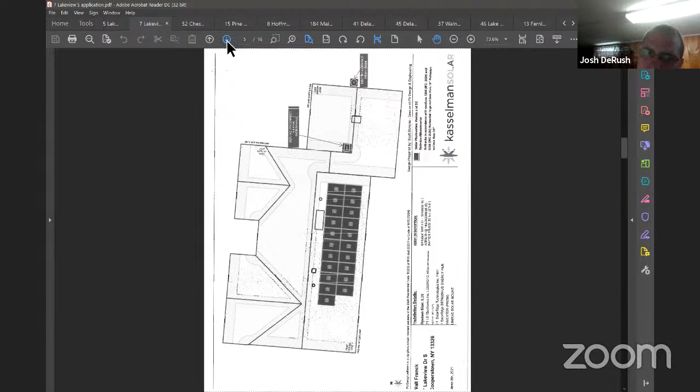We'll get to the picture. 21 solar panels on the rear roof, so nobody's going to be able to see it from the road. They are non-metallic, so no glares coming off them at all. We're doing the portrait, landscape, or basically a portrait style on the back, all flush mount. It's all metal racking underneath.

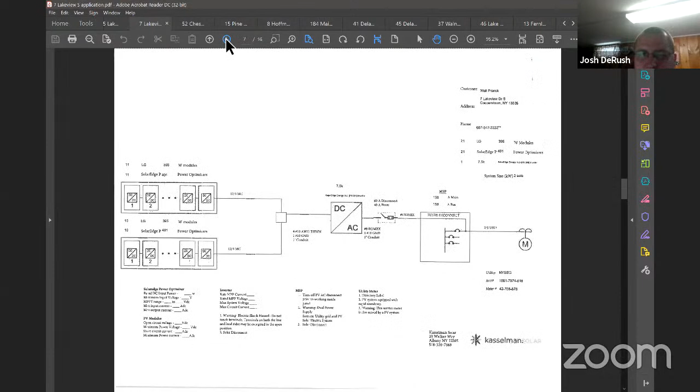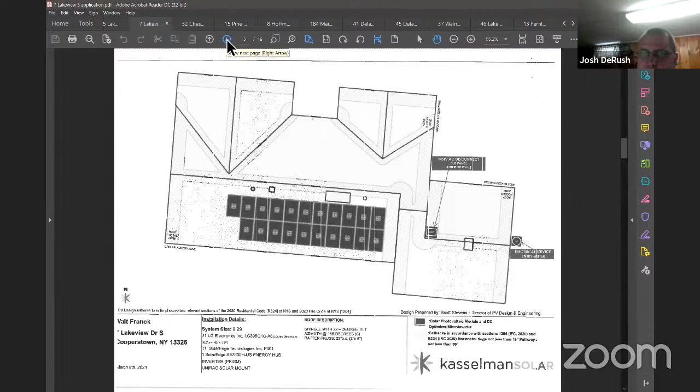They are LG panels, if I believe I'm correct. Yeah, so they're 365 LG panels, so they are definitely all black. There's nothing on metal siding that can reflect sun or anything like that. And that was basically the best side of the house with the way the sun hits their yard, so for them to get most production, that's kind of why we landed on that rear roof. And it's better from the road view, you can't see it the way it's sloped down in the back. So that's kind of what our design engineers and our salesmen came up with.

Great, does anybody have any questions for Josh? I don't, none here. And Jesse, I'm sorry, go ahead. Nope. Pat? No, no, I'm good.

Okay, and I'll just ask this for point of the grandmother test. If any other future homeowner or whatever wanted to remove these, they are reversible, not that you'd want to reverse them, but they can be removed, correct? Yep, they can be removed, and all the punctures from the roof can be sealed correctly, and there would be no leaks. So yes, fully removable system. And that's kind of something we weigh as a committee, if you're adding this material, you can take it away.

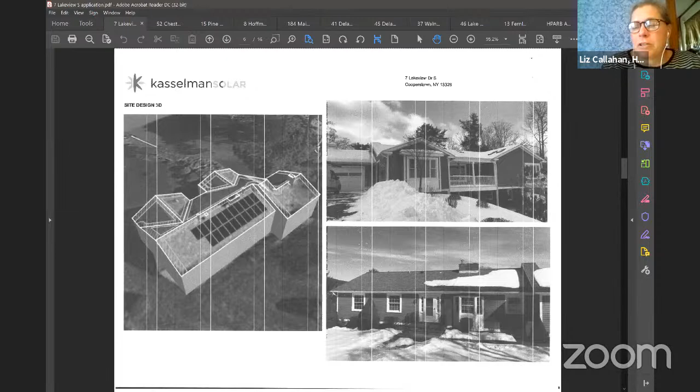So great, well, if there are no other questions, does anybody want to make a motion? Sure, I'll make a motion. Thanks, Mark. The Historic Preservation and Architectural Review Board has made the following findings regarding the installation of solar panels at 7 Lakeview Drive South: requirements of SEQR have been met, structure is not listed.

The proposed work meets the criteria under section 326E.

2B, 3C, and 5. Now therefore be it resolved.

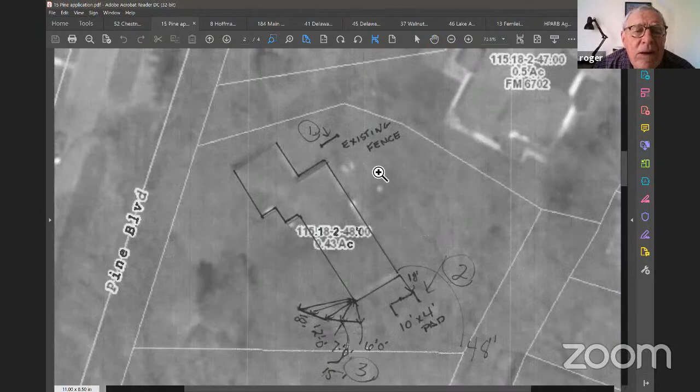So where my cursor is right now was one of the 6-foot tall panels that's only 8 feet wide. Then back here was where the propane tank was, so there's the 4-foot high panels that are wrapping on 3 sides. And then roughly in this area is the 48-foot long one that's basically designed to follow the grade, so it's angled somewhat.

Correct, Karen, as far as that goes, you said it perfectly. But it's outside of the setback requirements, so it did not need approval from the adjacent neighbor down here. None of this one is outside the setback. So neighbor approval was not required for this fence anywhere.

So the drawing is not to scale. That's the thing I stumbled over before. Yeah, it's a lot longer than what's shown in the picture. It's 48 feet long total. Yeah, okay, so I was trying to figure out how that worked.

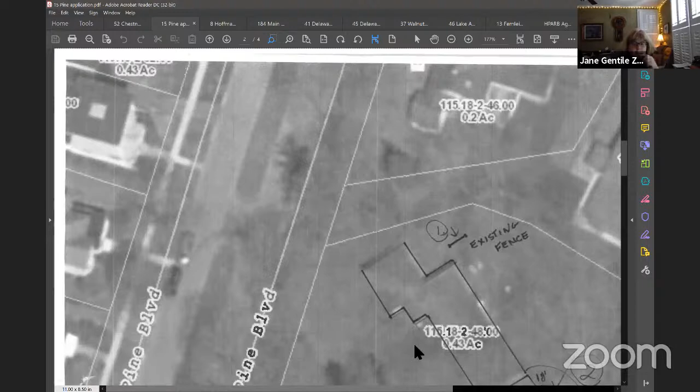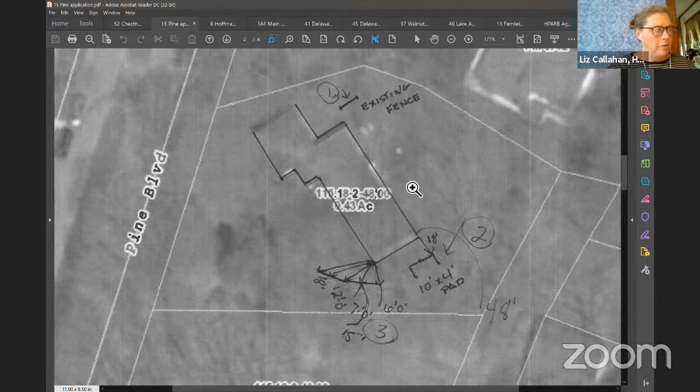And just to confirm, you've given us a photograph of a wood fence. I will confirm that the materials are wood. Correct. Okay.

Anybody have any questions? It should be 15 Pine and not 13 Pine. Right, I hadn't even noticed it on the order. That's your address though, so that's fine. But the application reads correctly, so that's fine. We can do that.

Thanks. And the image, now there are two different images. The image in the estimate is a little bit different than the image in the picture. Yes, when he presented it to me, he said, what about this one? And I don't, it's got too much going on, I don't want the lattice. Basically, it's gonna end up looking like the fence at the Bank of Cooperstown.

Will it have the copper finials too, or caps I should say? No, it won't. My goal is to have it mimic the board and batten house, and then paint it the same color as the house, which is dark green, so it all blends in. The house is looking really good. Thank you. All right, any other questions?

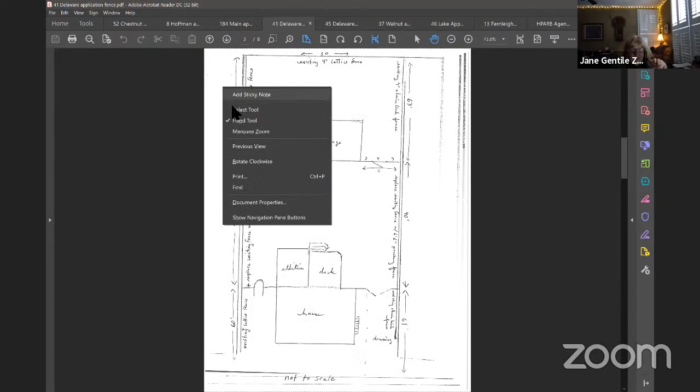This is not to scale because the property is 50 feet wide and 160 something deep. In order to get it to scale, I would have had to use 2 pieces of paper, which I did.

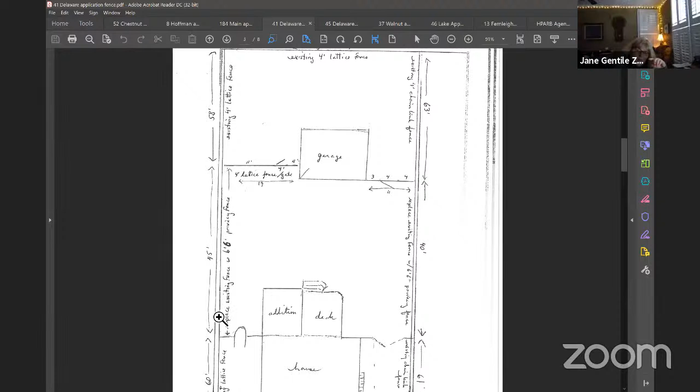This is the 6 foot privacy fence, here and here. Here's the existing fence where the trellis is. This is the back of the original house before the addition. So it'll go from the trellis this far back, which is 45 feet on that side, and that'll be 6 foot 6 inches. It's pressure treated panels, but the top part has 1.5 feet of lattice.

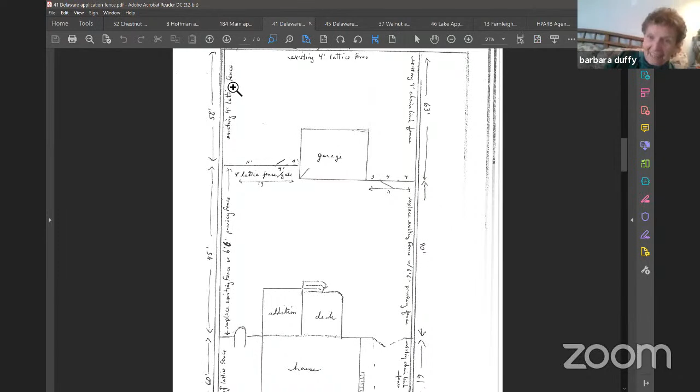Like the picture the other lady didn't like, I liked because I'm trying to make it sort of consistent with the existing fence, which is all lattice. That's the idea that I want to put up.

I think I gave you a picture of my existing fence. We do have that in the file. The problem with the existing one is the dogs can see through and they pay attention to everything that happens. So the outside border pieces will be 6'6" and then have some lattice on the top.

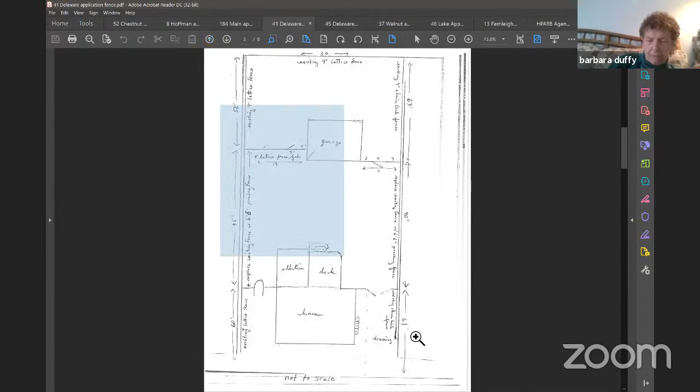Then the interior fences go from the border to the garage. This goes behind the door of the garage, so I can still get in. That will be the same as what's around the rest of the property, 4 foot 4 inches with all lattice. And on this side, it goes 11 feet to the side, same thing.

Both of them have gates. I may have to make this 4 foot gate a little wider because I'm not sure it'll be wide enough for any workman that needs to get to the back section, because there's still almost 60 feet of land in the back. It's a very, very deep piece of property.

So this part will look like this, and they can see through it, but there's not as much to see through as there is on the sides.

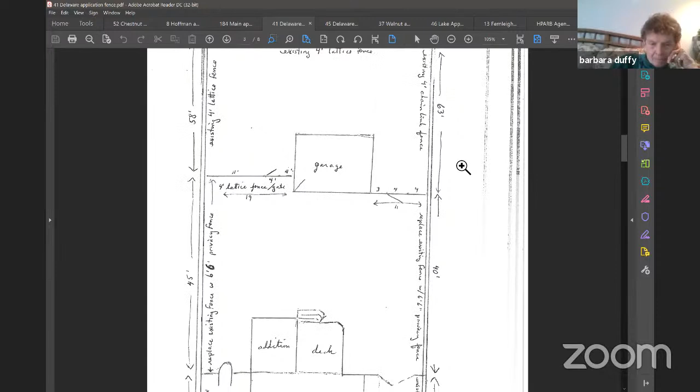Did she need permission from the neighbors? Yeah, she has a letter in the file. And they were both thrilled.

That's a lot of dog. Yeah, it is. They're beautiful, but they're a handful and they like to pay attention to what's going on, especially on the southern side where Orion rents. The driveway is right there, so everybody that comes in gets a bit of a welcoming. 2 German Shepherds.

Well, the one that's going to be 11 years old, I don't expect to live very long. She's got a problem with her spleen. Last year they told me she probably had weeks. Well, she's surviving quite well and enjoying the backyard, but she's not going to live much longer. So then I'll be down to 1.

The younger one is just 3. And my 2 cats inside. Very exciting at my house. Sounds like a handful, kind of a rodeo, I think, most of the time.

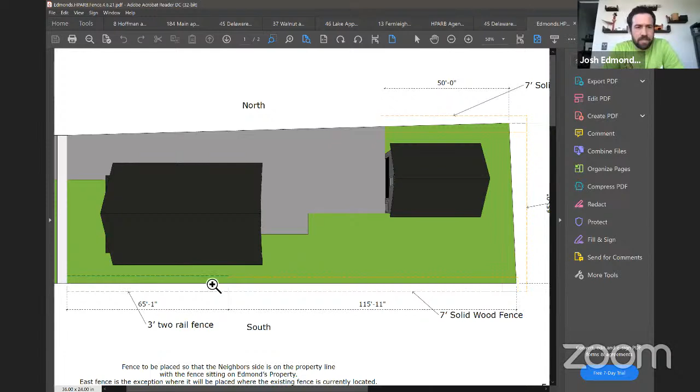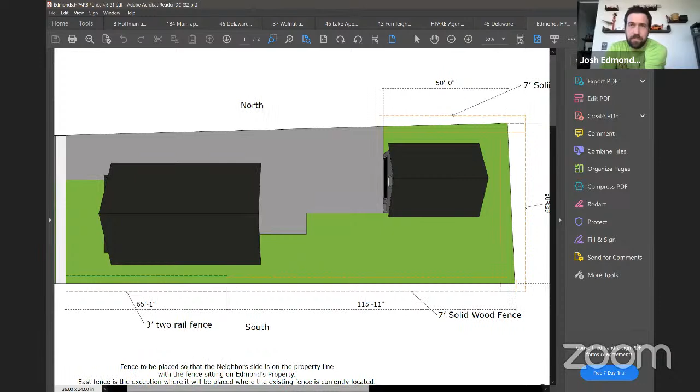So what you're looking at, on the bottom side of the drawing here, the front section, the front 65 feet, there is an existing 2-rail fence that runs along there. I simply want to replace that. And then the back section currently has a 6-foot tall privacy fence. I'd like to replace that with a 7-foot. And then on the back of the property, there's a privacy fence too, and I'd just like them all to match, so I'm just replacing that one right where it is. The only new fence is at the top there on the north side, where I'm doing a section wrapping along that side of the garage.

The proposed fence, the new fence, is going to be larch, which is like a cousin of hemlock. It's slightly rot resistant, but not pressure treated. I am using pressure treated 6x6 for my main posts, just because if they're going to be in the ground, they'll last a lot longer.

So that's the back fence I want to replace. Why do you want to add the extra foot? Because my property is higher than my neighbor's, so on my side I'll have a 6-foot fence and the neighbor's side is 7 foot. That's the reason for the additional foot.

Because right now I kind of see right over top, and the house on the corner, we share a very tight backyard. That way, when we're sitting on the porch, we're not staring at the neighbors eating their dinner at the same time.

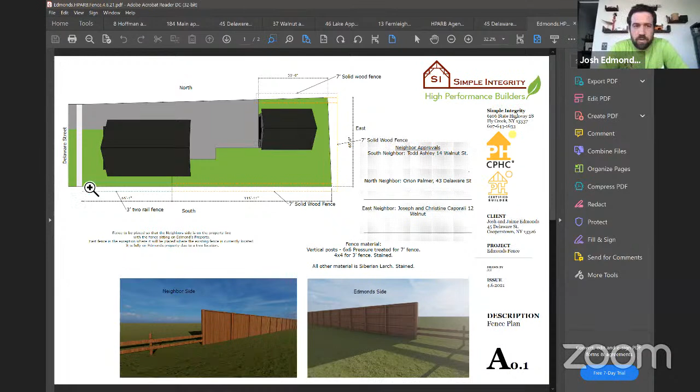Okay, any other questions for Josh? And it's as pictured in the images, in A0.1, correct Josh? Yes, that is the actual drawing of the fence I plan to construct.

Any questions? Somebody like to make a motion? Sure, I can make a motion. Thank you, Mark.

Whereas the Historic Preservation and Architectural Review Board has made the following findings regarding installation of fencing at 45 Delaware Street: no public hearing was required, requirements of SEQRA have been met, structure is not listed, proposed work meets the criteria under 326E, 2C, 3C, 3D. Now therefore be it resolved.

Thank you. Anybody like to second that? Yes, Roger, second. Thank you. Any discussion?

Okay, Liz votes yay, Pat yes, Mark yes, Roger yes, Jesse yes.

Thank you, Josh. Have a good evening. You guys too. Thanks.

Okay, on to item number 7 on the regular agenda, 8 Hoffman Lane. Ian will let you in so you can talk. Great.

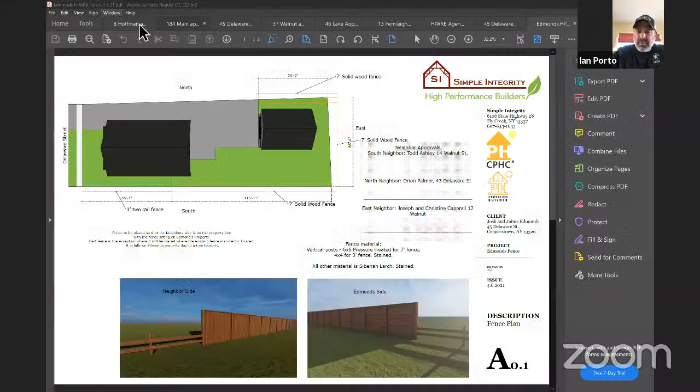We're here tonight to ask board approval for constructing an egress stairway off the existing exterior deck, which will run along the side of the building and then come out.

The reason for it is that I made a decision a couple weeks ago, hopefully not to regret, but there used to be a spiral staircase on the interior of the building that was, after talking with Tony Gentile, with John, and some insurance buddies, it really couldn't be used anymore. It was given a variance years ago, but in today's modern time, a staircase doesn't fit code anymore. So technically, customers couldn't use the stairway.

Second, it was going to be dangerous for my staffers to go up the stairway. So I decided to take that stairway out and make it kitchen space. In doing so, it changes my occupancy on the second floor and on the deck, which was sort of painful, but it was sort of a win in the kitchen.

So in meeting with John and Tony some more, having the egress stairway off the deck puts us back in fire code and occupancy, I guess, well-being and safety of our guests on the second floor. We're trying to make it a very open and airy stairway, so it's not all blocked in. So I guess I've come to the board for approval on that stairway.

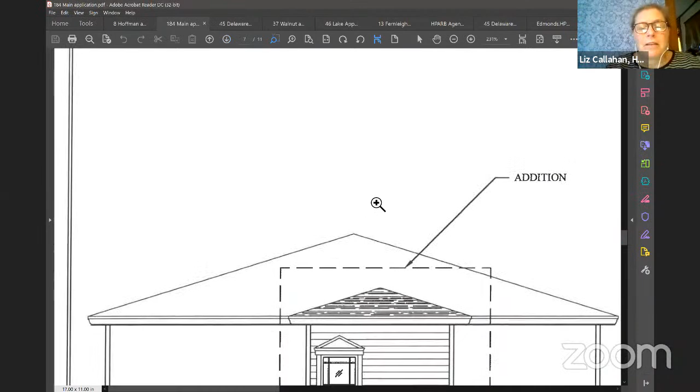Are you going to try to preserve the ornamental feature above the window? Yeah, the goal is to preserve the pediment and the original window, as well as the storm windows we did a few years ago.

And then you'll have windows on the west side also? Correct, those would just be standard Marvin windows. Because of the roof structure, we couldn't add windows matching the existing dimension on the second floor. On the first floor, the Cadwaladers added windows at least 10 years ago on the north side, either side of the fireplace. So we'll go with the same style of Marvin, no divisions in the lights, just full dimension wood windows on the inside. Again, it's not our job to design.

I just wondered if you had thought about mimicking that attic window with the divided lights. That was my question as well. The little dormer - I think you guys added that, right? Yes, construction hasn't begun on that. That window is an antique stained glass window we found that matches the existing one, and the one to the right with similar treatment on the third floor. That's also an original stained glass window. It can be replicated - it's not that difficult to do.

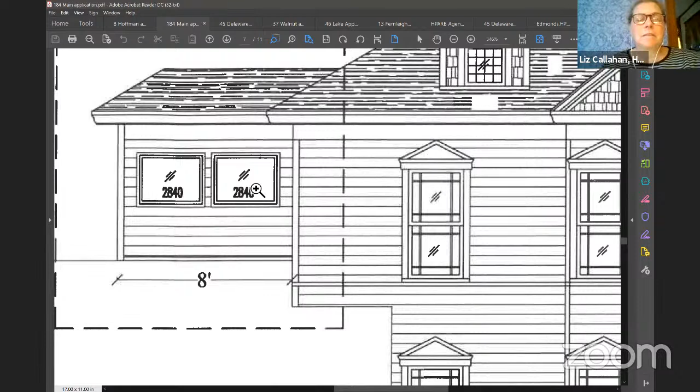Now, would you be looking for divided light windows, or would you find the type of window in this drawing acceptable? Is that a casement window, or is that what you're using? It might be awning. I'm not 100% sure what the product number is specifically on that.

Well, what are you trying to do with it? Are you ventilating as well as bringing in light? It'd be a good option to be able to ventilate. Just adding the windows. What we really don't want to do is reconstruct original wood windows and go to the cost of adding storm windows on top of them.

We don't really want to end up with single pane wood windows. It was a substantial cost to keep the original windows, and we don't want to continue adding to those. This is a facade that faces a street, am I correct? Yes, it faces Pine Boulevard.

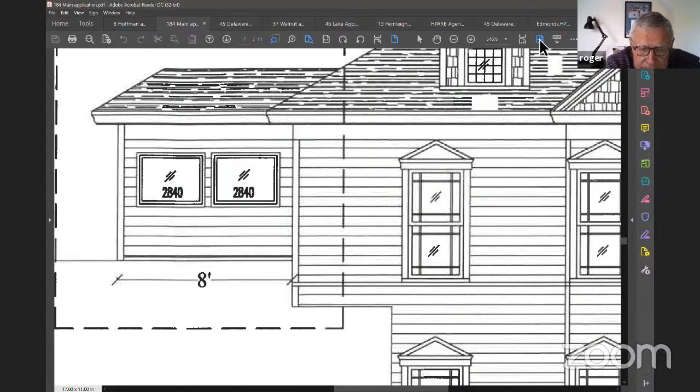I'm concerned that the size of the dormer would be pretty small compared to the square footage of the new roof. The other dormers have a lot more square footage on that roof where they are. I think the amount of gain would be minimal for substantial expense. I think the pitch of the roof on the new addition is relatively small compared to the pitch and square footage of the roof where the next dormer is, going towards Main Street. So I think it'd be a long run for a short leap.

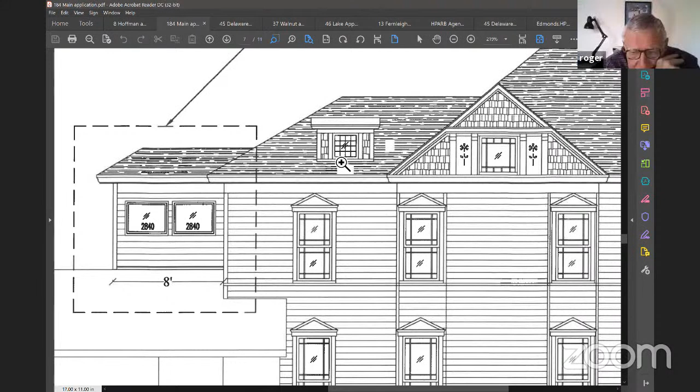Wait a minute, are you thinking we're talking about putting a window in the roof face facing north? No, facing west. These windows are virtually the same size as the one in the dormer. Roger, are you thinking we're suggesting another dormer there? No, no, I'm just talking about the windows, just taking the rectangle of the dormer and applying it to the rectangle of the two windows that are listed.

Oh, okay, I misunderstood. Okay, the 2840, that's what I'm talking about. Okay, good. Yeah, I think that would be a very nice addition. It would look good, it would soften it. Yeah, there you go, good way of putting it.

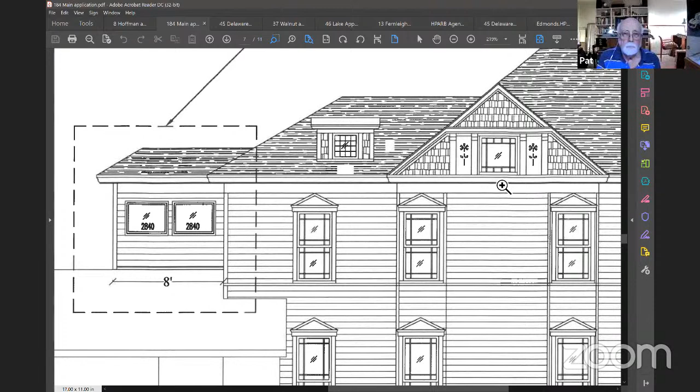So we discourage grids between glass, but to get dimensional grids on the outside would potentially be the thing to do as opposed to a true divided light. So those would be the only clear glass divided lights we would have. The only ones we do have are actually wood storm windows. We kept two of them on one of the large bays in our dining room, two of the wooden storm windows that are divided light. But the actual windows, the only divided light windows we have are full stained glass.

Okay, so the drawings then, John, are misrepresenting things. So those windows- right, that's actually a Red Point CAD file, and you're correct, those are not the actual windows. They're full glass. And the dormer that hasn't been built yet is going to be stained glass, and the dormer to the right of that, on the third floor, is stained glass. Is that what you're saying?

Correct. The window that has the two flowers on either side is original stained glass, the sides are stained, the middle is a clear panel. The small dormer that's yet to be built will be full stained glass, in keeping with the other square windows we have on our east side.

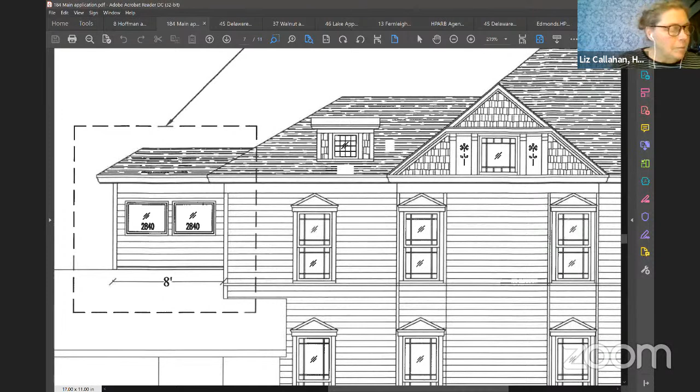It makes more sense, but are they 2/2s? No, they're 1/1s. I think they look...

Because they're single light and their orientation is opposite to everything else in the building, except for the ones in the attic spaces, which are horizontally oriented, I think they would look less like they'd been popped in there in the 1980s if they had the surround, the muntin design that's in that attic window.

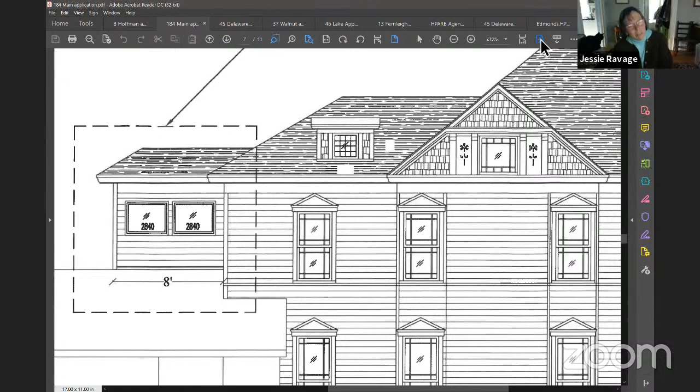Would it be acceptable to have that between the panes of glass? I think you'd probably be fine with that, honestly. It's a lot less expensive, it would be a lot easier to maintain, and it faces the street, but it's up above something you're just trying to soften.

What's a bit of a carbuncle already on that building, that back garage, is a clunker, so you're just trying to improve its appearance a little bit. I realize it's useful, but when it was put on, it lacks some sympathy with the building it was put onto, but this would just diminish that lack of sympathy a little, I think.

I get concerned that we're not supposed to be designing a project. We're not architects, and talking about softening things, our job is to adhere to the law of Cooperstown and whether the project meets the criteria of the law, not to redesign a project. I just think we're maybe overstepping our bounds.

That caution is, I hear what you're saying. We're not trying to redesign a project, and that's not our job, I don't think, but maybe I'm being too provincial. No, you're not being too provincial, because there is a reminder that we're not supposed to do a redesign.

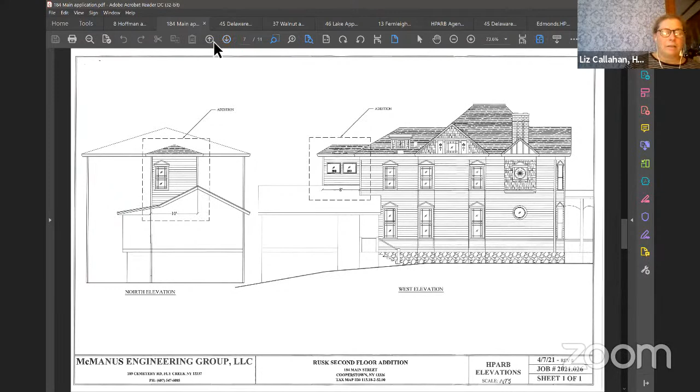I think what we're ideally asking Tom to do is consider the treatment of the windows and maybe come in for a field change, and I think that would be the appropriate thing to do, in addition to the drawing being a little hard to imagine because of the way the other windows are presented on the drawing.

It also does not present the windows on that little vestibule underneath the addition or the windows on the rear portion of the house. So in the image, Jane, if you follow the chimney down you have this little vestibule, I'm pointing at my screen, it's not that window, and then the windows to the left of it aren't presented in the drawing.

So I'm just trying to visualize how these windows are going to look on this addition when the addition isn't clearly represented in the drawing, and the other windows on the house in the drawing aren't all represented accurately. Right, he doesn't have any of this shown, and he's actually showing 2 windows here and there's only 1 window.

Right, and so I would be inclined to encourage you to think about how to make the windows a little more cohesive with the house.

So I'm going to go back to my point that if you look at the roof structure on the picture you have up, if you follow the brown wooden trim at the sill of that 2nd-story window, you'll see that it dies into that back roof. And so the addition we're proposing, if you see where the chimney is coming out of the 3rd floor, that wall is actually going to be right in line with the peak of that roof, so we're not going to be able to add windows anywhere near the size of the windows currently on that facade.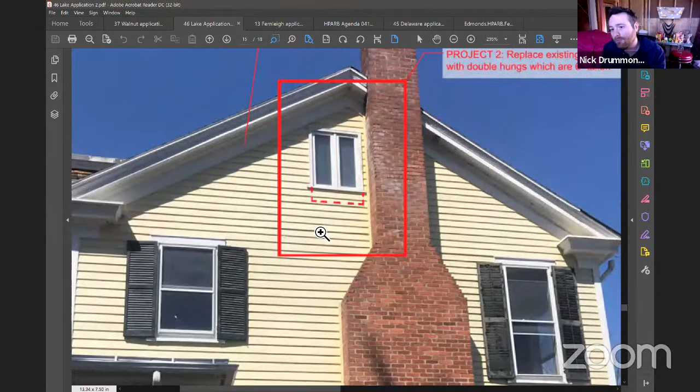You could almost see there's a little dashed red outline to sort of say that we'd be dropping the bottom of the window. And those would not have shutters, basically for this reason, because the chimney's right there.

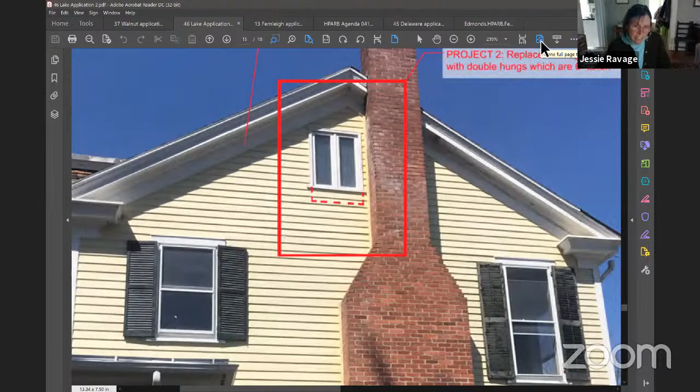Everybody thought they wanted a fireplace. I know, it's 60s. And then, so I guess I might as well run through some of the projects while we're doing it.

So project 3 is related to the front of the house. This is the current front of the house. Again, a lot of this all dates to the 60s when the 2/2 windows were replaced. Everything was sort of tried to become colonial revival.

Sorry, the puppy. Guys, shush, shush. I'm sorry, hold on, we've got 2 growling puppies here.

2 jealous brothers. So the homeowner would like to return the home to its appearance in 1913, before the 1960s renovations, for the most part.

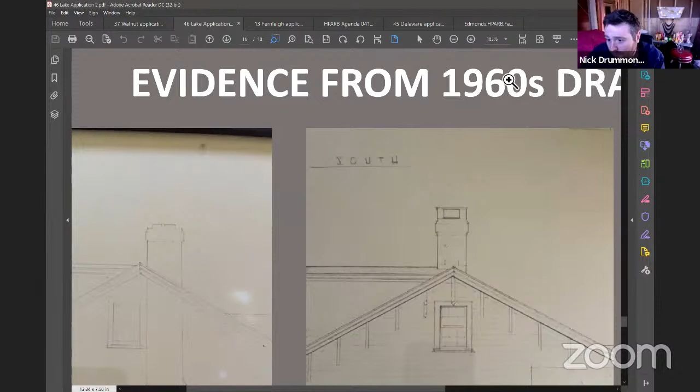And so what that would entail is the original dormer windows were more of a Second Empire style, more Victorian detailing. They would like that back. And so they would also like, there were corbels going around the house, they would like to return those.

And so this is kind of, it's a funny house because it's still going to be a mishmash of styles, but that's what it has been. So we're sort of seeking a return to its mishmash before they tried to change everything in the 60s.

Now, one thing I will say, as we had pointed out, the original windows were 2/2, where now they're all 6/6. Because the plan is to keep all the 6/6 windows, our current thought is to leave the existing 6/6 sashes in those dormer windows and basically rebuild everything around them.

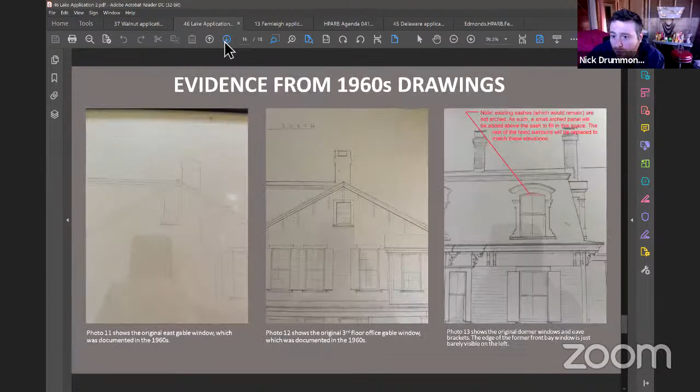Technically, the original windows were 2/2 and they were arched. So we would have to add a small arched panel on top of these sashes to mimic the original look. If you go to that last page, that's what we'd be mimicking. Basically, we'd do that, except we would have the 6/6 and we'd have to do an arched panel on top to fill in that space.

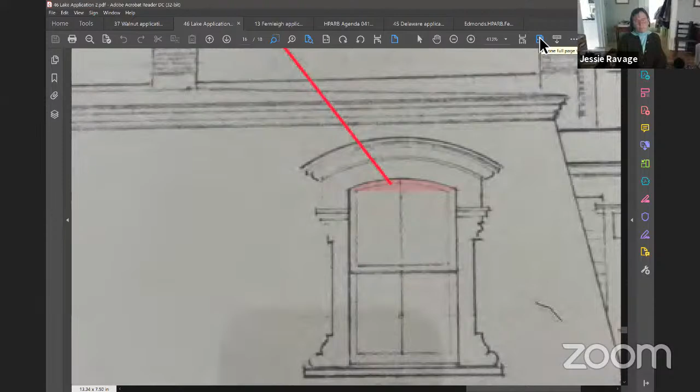So you'd literally have a piece of wood filler there? You see that a lot. It'd be a cover - yep, that's the current plan at least.

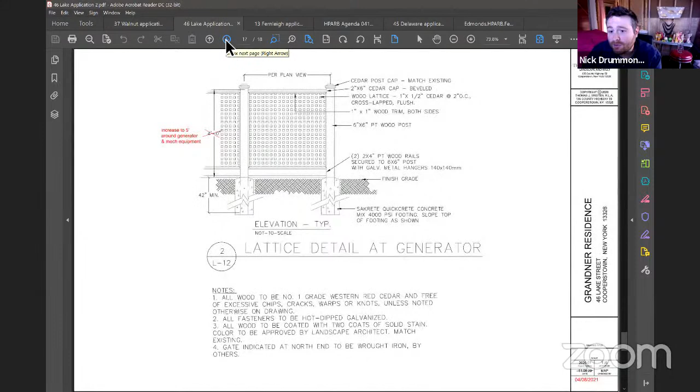There was also a fourth project, sort of unrelated to all this stuff - a field change request related to a fence around some mechanical equipment by the garage. It was originally proposed one way, but we're asking to increase the height and change the layout slightly. Since this was initially approved, in consulting with our HVAC guy, this is basically the only spot we can put our outdoor condensers, which are fairly tall. There's an existing 5-foot fence right behind this garage, which is not shown actually, and we would be increasing this to match that height, 5 feet. The goal again would be to screen off the mechanical equipment.

There's actually one thing with this - we may have to come back for another field change. In talking with the homeowner right before this meeting, she expressed a slight alteration to this layout, which I could share on my screen with you, or we could come back. I'm not sure how screen sharing would work.

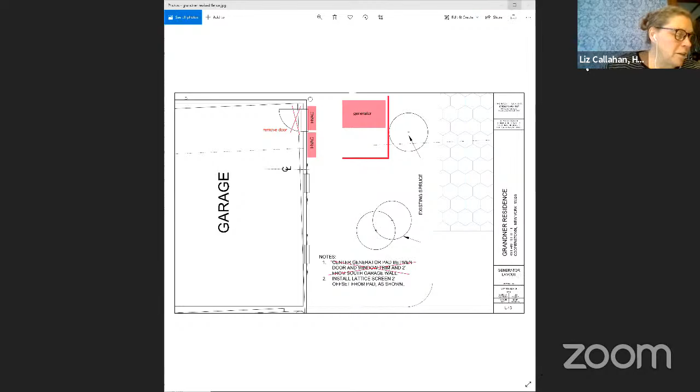Okay, can we back up to the discussion of the dormer windows on the third floor and changing to the 1913 window design? My concern or question is: is it just the windows that are changing, or will the roof and the trim above and below the windows change too? Because that window design is from 1913, but the mansard roof wasn't shingled, and you have more trim - soffit, fascia boards, etc. running through there. Correct? That original isn't in place anymore, is it?

No, it's not. So basically what we'd be doing - the dormers themselves, besides the original sash, which we're keeping mainly because all the other windows are 6/6, so we figured we should match them - we would be rebuilding the entire surround. It would go from the pediment to the arched hood, and we'd add all the Victorian detailing. As far as the trim around the house, the fascia board running around the house, we would also restore that to its 1913 appearance. It actually had the fascia board originally, so it was kind of weird - in 1913 that's when they added the big pediment, the big portico on the front. So they made it colonial revival, but then threw a bunch of Italianate brackets everywhere. It's a little weird, but that's what we'd be doing - matching that part of its history.

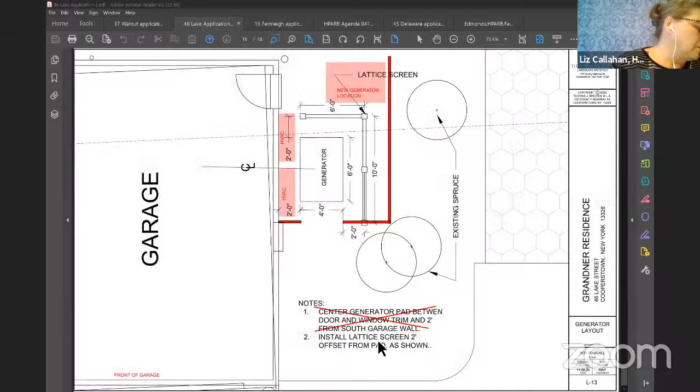Jane, can you bring that picture up again, or the blueprint? How far back do you want to go? The 1913 window drawing picture. Oh, this way. That one? Yeah.

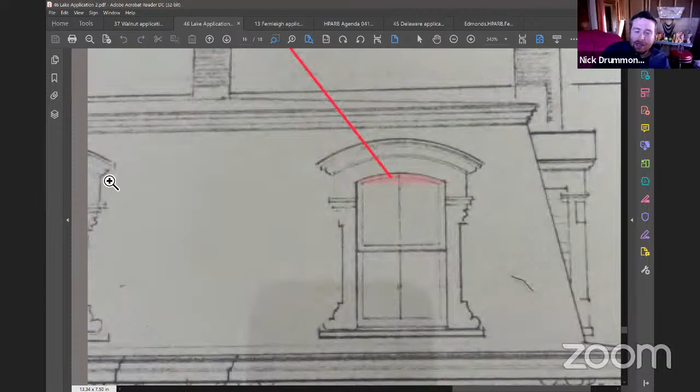Well, that's not 1913, I don't think. That's earlier - this is an Italianate, 1870 to 1880 remodel. So in the little document about the history of the house, the existing records specifically say the mansard roof was added in 1913. However, I disagree, I think that's highly unlikely. Even though the records show that, I agree - I think this is more like late 19th century, and then the colonial revival portico was added.

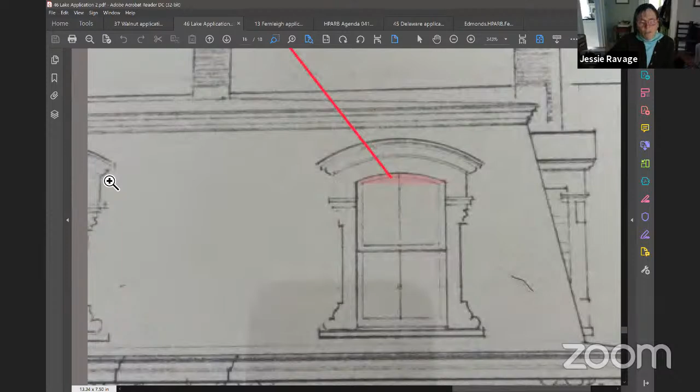So I think you do have 6/6s in the earliest imagery you've got. In a way, it's those 6/6s that you've got now that you're restoring. That makes perfect sense. So Jane, can we go to the next one?

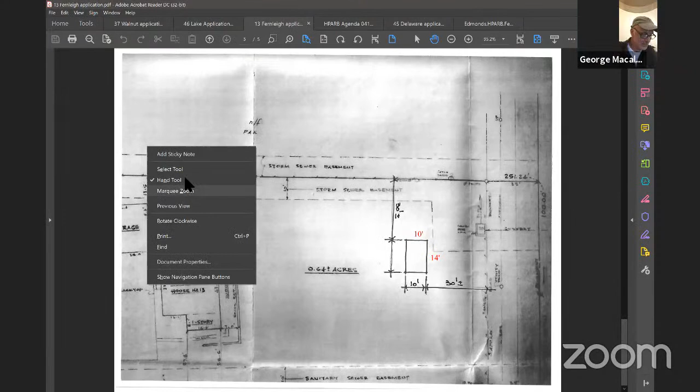The exterior is hemlock siding. There will be two doors on one end with black hardware. It's all wood on the exterior, pretty much the one type of material. And then it'll be black asphalt architectural shingles to match the house.

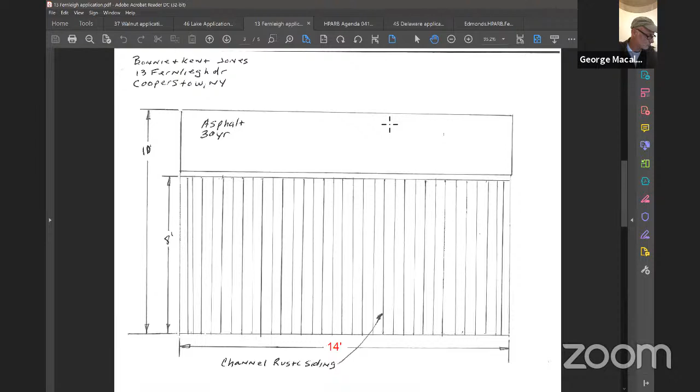All right, the foundation, is it going to be on a pad? It's going to be on piers. Cement piers, or pressure treated piers? Cement piers. Okay.

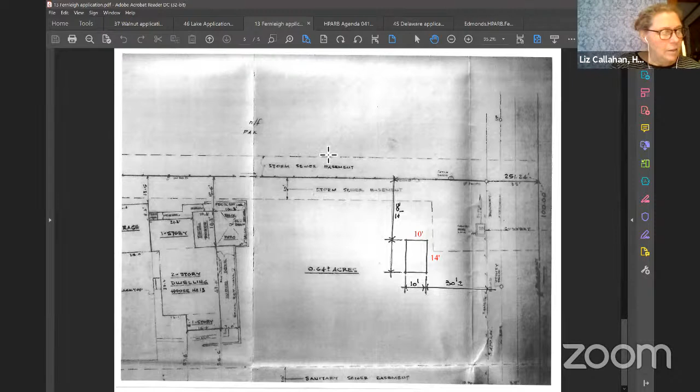Anybody else have any questions? The little vent in the top, wood or metal vent? Wood vent. It's pretty cut and dry here. Thank you for making this simple. You're welcome.

Everybody good with the design as presented? Yes. Would anybody like to make a motion? Whereas the Historic Preservation and Architectural Review Board has made the following findings of fact concerning construction of a shed at 13 Fernleigh: no public hearing required, requirements of SEQRA have been met, structure is not listed, proposed work meets the criteria under 326E, 2C, 3B, 3C, 3D. Now therefore be it resolved.

Thank you. Do we have a second? Roger, second. Any discussion? No. Liz votes yay. Mark, Jesse, yes. Pat, yes. Roger, yes. Jesse, yes.

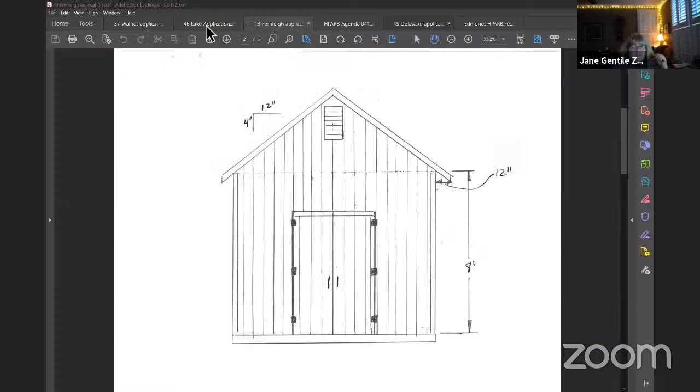I have real hesitations about metal on that house. Yeah, I agree. Jane, you may not have been in town when that other house was rehabbed, but it was in much more desperate shape, and the dimensions and massing of that house are different. I'm not thrilled about that other house, but that one was short of falling over.

I don't think I was on the board at that point. I don't know if you were, Roger, but this house, for many reasons, should not have a metal roof on it.

I agree. Why do they want to do that? I have no idea - cheaper, maybe. I can't believe it's actually cheaper than a new asphalt roof, and this isn't a very big house. With some of the different shifts in the roof it might be a little more expensive, but it shouldn't be an expensive house to roof.